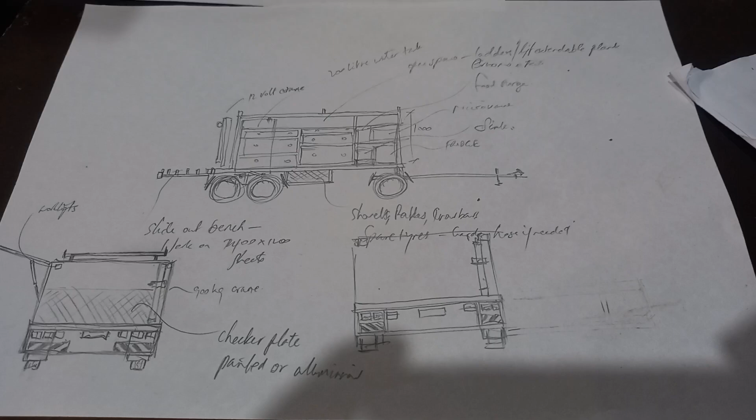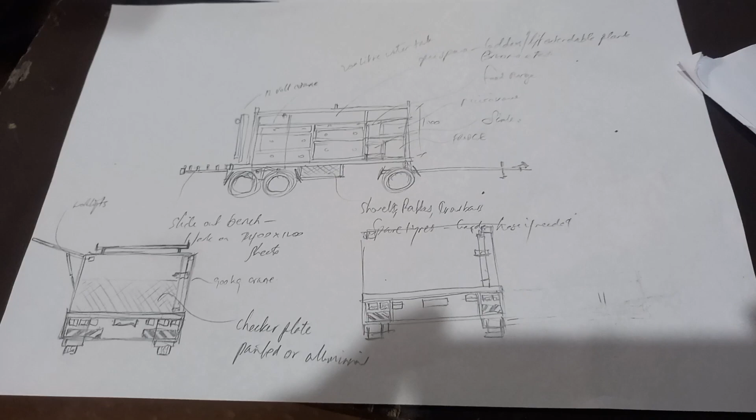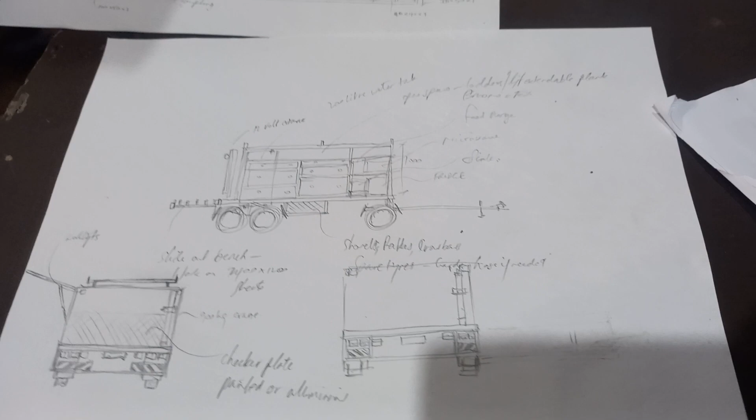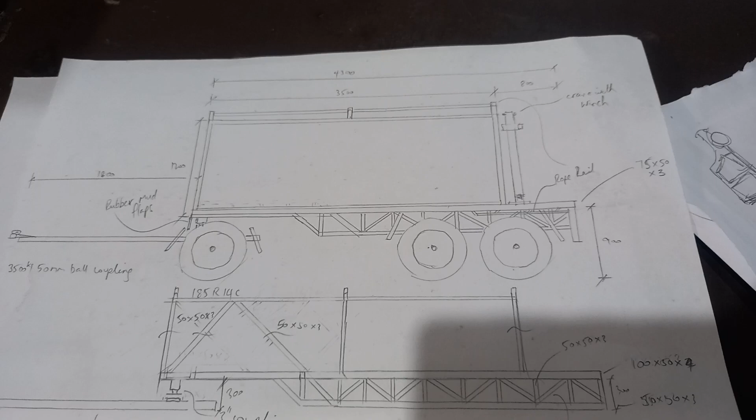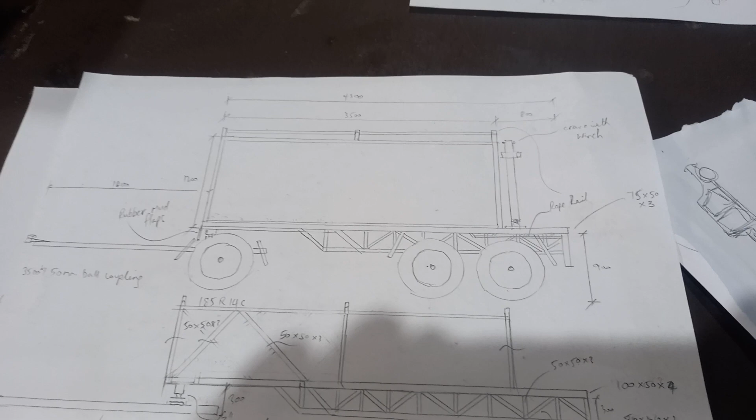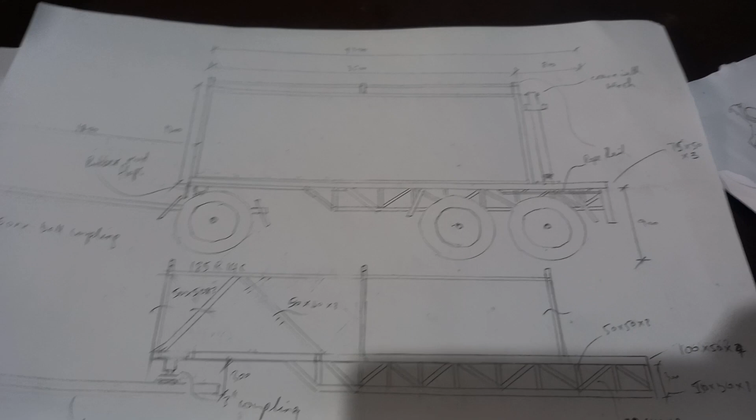So this particular trailer is effectively a workshop trailer, so it'll be 4 metres long, 3.5 metre toolbox with a 800 mil bench out the back with a little 900 kilogram crane. So I've sort of made a little bit of a frame down here. This is the initial design. This is how I start all my trailers. I just work out something that looks good on paper, and if I'm happy with that, I'll move forward. So here's a few scribbles about a couple of extra changes. And obviously we've got the sides up just to show all the toolboxes and what have you.

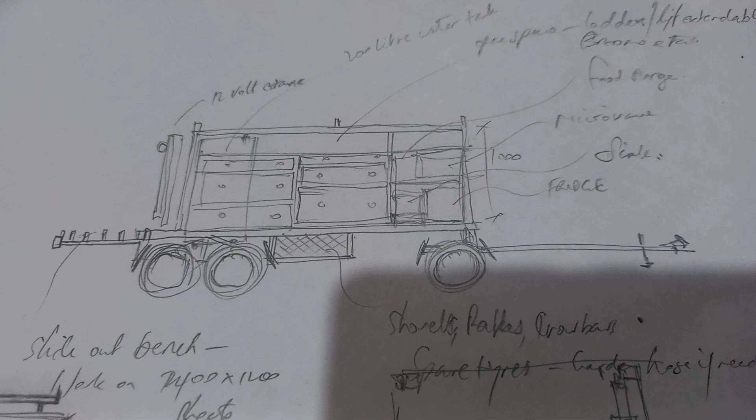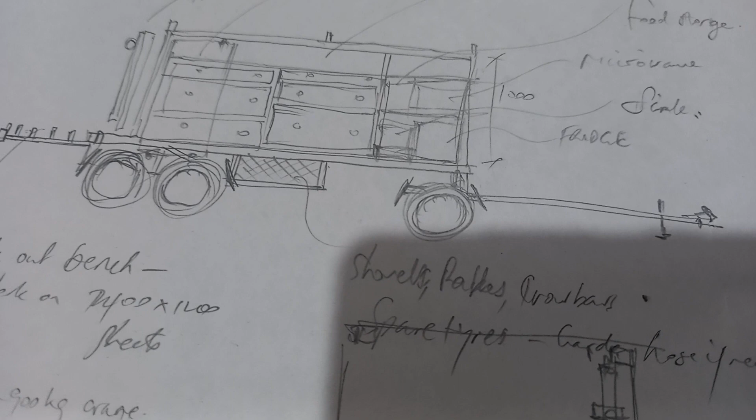So I really do like my 12-volt systems, as people in the videos can attest. So right-hand front will be my cooking area. So this one here is just going to have a little sink in it. It'll have a fridge, microwave, sandwich press, you name it, plus also a cupboard so that I can keep my kitchen supplies and food for the day, because some of my work will be remote. Down the bottom, right in here, sorry for the shadow, is going to be a basket to put dirty stuff like shovels, rakes, all that sort of stuff.

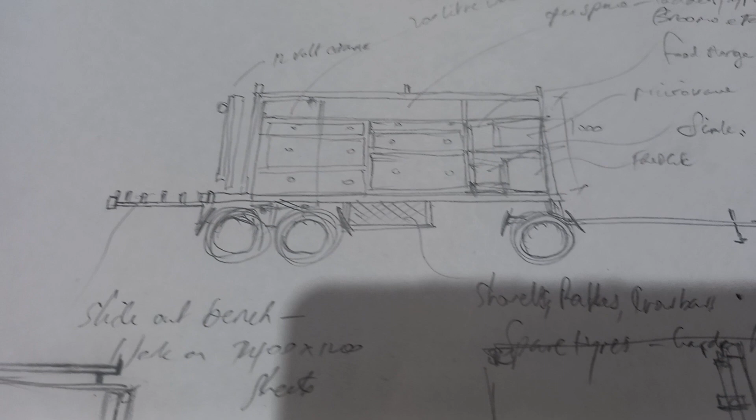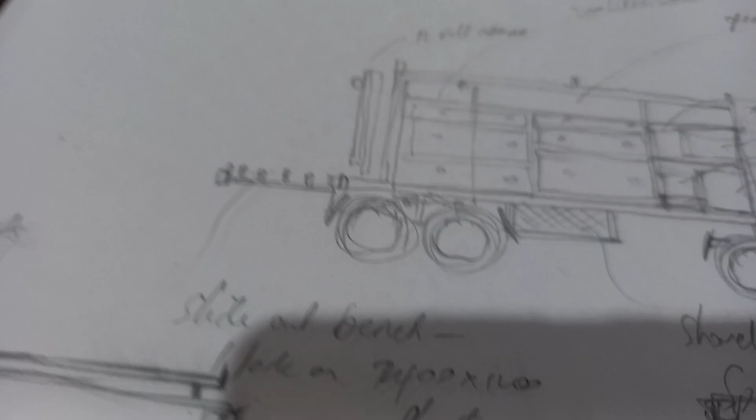So crane on the back. Out the back of the trailer is going to be a slide out bench. And the idea is that we can slide it out to accommodate a 2400 by 1200 sheet of timber, and we can work on that. So those little pieces of uprights that you see will be just timber that slots in. So if we drill it, if we cut it with a saw, we can simply just replace them. So it's going to be a dog trailer again. Fundamental change compared to my last dog trailer comes down to its pivot point, and I'll see if I can find the other drawing that I've done.

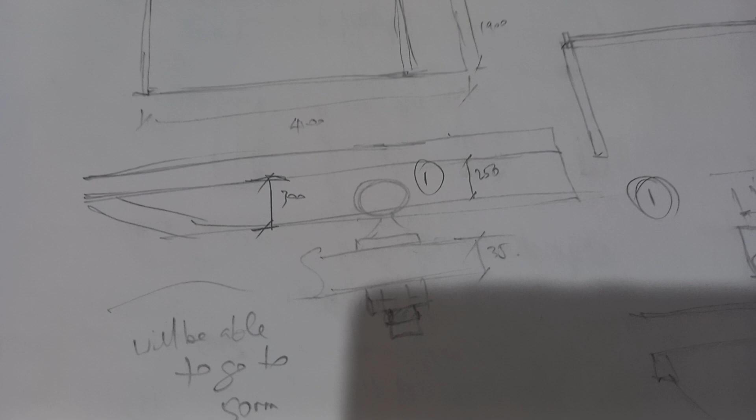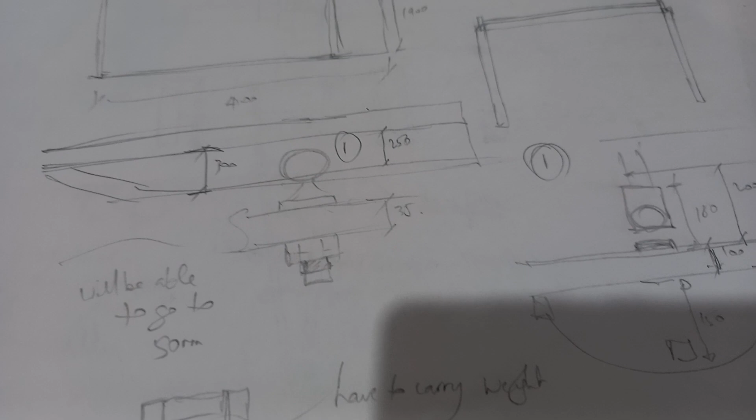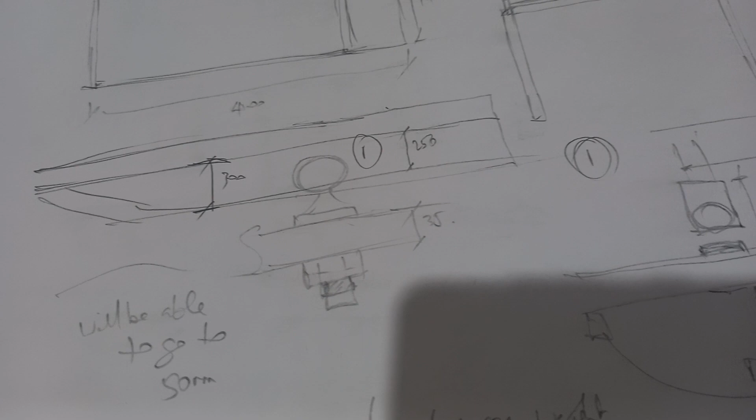Rightio. So we're going back to a tow ball this time, but it'll be a 3-inch coupling, and the main benefit that I see with a fifth wheel hitch or coupling or ball assembly or whatever is the fact that you've got lateral movement on the front, side to side, so it becomes like an independent unit rather than requiring the suspension to do all the physical work. So this can tilt approximately 15 degrees in any direction. So going through a rut or over channel country or whatever the case may be, the front wheel can move in a different direction to the rest of the trailer. That way we're not twisting the trailer.

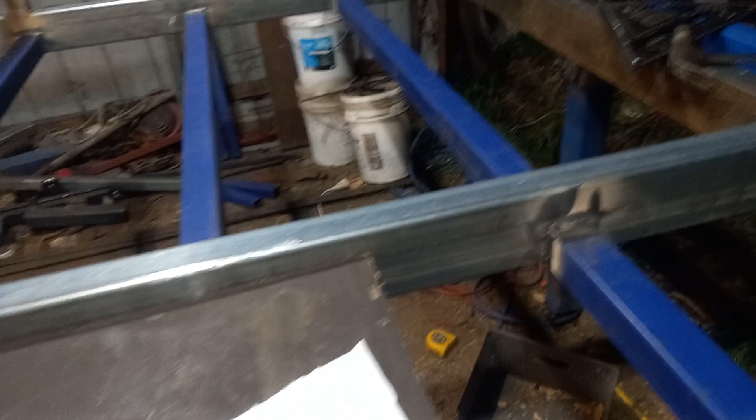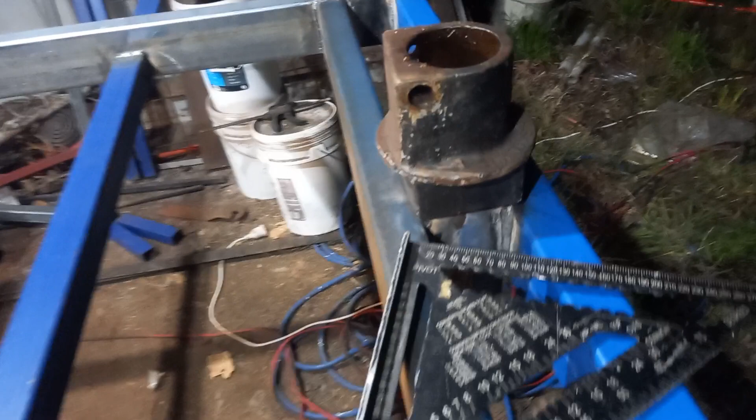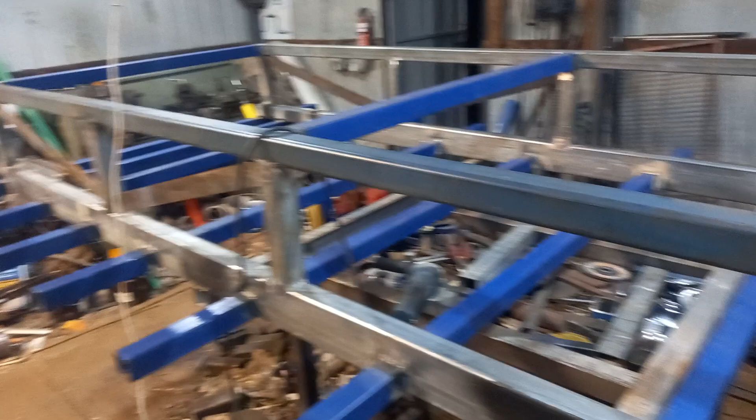But I just thought I'd show you where I am up with it. So excuse the mess, but creative people and messy people, as they say. So as you can see, it's upside down. But this is my new trailer. Box assembly. We've got our beloved 3-inch ball. The drawbar assembly sits on with the ball on it, and that coupling just goes on top. This here, down the back here, we have axle mounts. They're not on yet, but they will be. And this here is the basket, as I call it. So the basket is designed to carry all your rakes and associated parts.

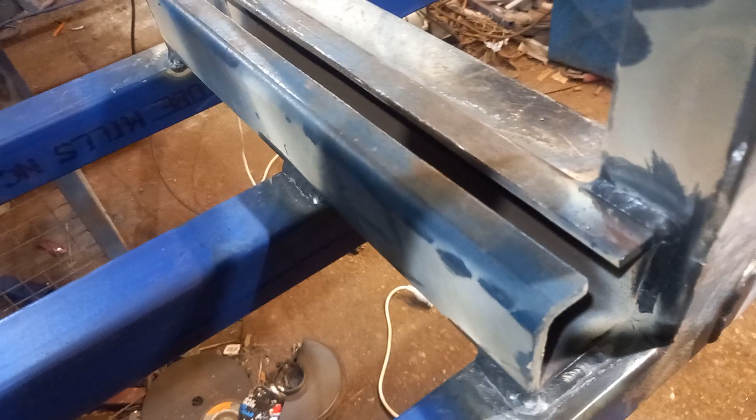I'll just come around. These slides here are what the tray slides out on for our workbench. What I've done is I've purposely cut out with plasma the bottom of the 65 by 65 by 5mm and put a slot in it. And the whole purpose of that is that this thing is driving around on the road, so it's going to get a whole heap of road grime in it. So if it gets any moisture or anything like that, I want it to come out through that slot so that it doesn't bind up and rust up into the tube. So there is one on either side. She's all welded in position. And then the table just slides back into where it needs to be.

So this is the trailer. Main structure, of course, is 100 by 50 by 3mm. And it's a 50 by 50 by 3mm for the base of the axle mounts. So that's the new project. We're going to run through it. My next video, I'll go through the computations required.

A lot of people ask what sort of requirements are needed in Rover these days, or the infrastructure department. So just wanted to go through and show people how I calculate stuff so that we make sure that it meets the requirements. And that information then goes to Rover and the infrastructure department for the permit number. So I have no intention of getting an engineer to sign off for the simple reason that the paperwork and the infrastructure's requirements on making a homemade trailer are pretty clear and pretty simple. And yeah, so that'll be the next video.